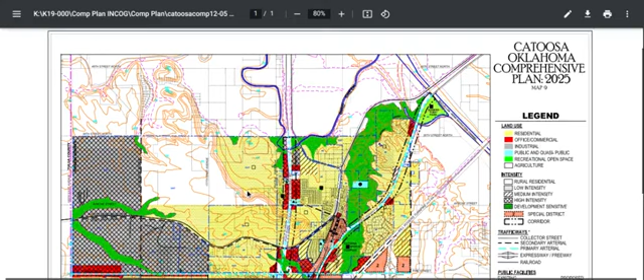Okay, let's get to the map. This is the INCOG map prepared back in 2000, 2001. But they've taken the comprehensive plan and laid it over this map. So this is the 2025 comprehensive plan, which the Unified Development Code goes hand in hand with.

If you'd like to read the comprehensive plan, it is also on the cityofcatoosa.org website. This Unified Development Code is a zoning code. I'm all flustered now that I've had to start over. As I was saying before, I messed up - I'm reading through the comprehensive plan.

I've already read through the comprehensive plan in part 1. If you'd like to go back and watch that video, it's on YouTube. I need to link those. It's still in the group - if you click on my face in the group, it'll show you all the things I've posted, and you should see all the videos. You can scroll back and find part 1 to see where I went over the comprehensive plan. I didn't read it word for word, but I went over it and explained some of it.

And this Unified Development Code is zoning. Basically, they're taking their old zoning and re-documenting it into a new form, supposedly making it more streamlined and simple. I've never seen the old zoning codes, so I wouldn't mind having a copy to compare.

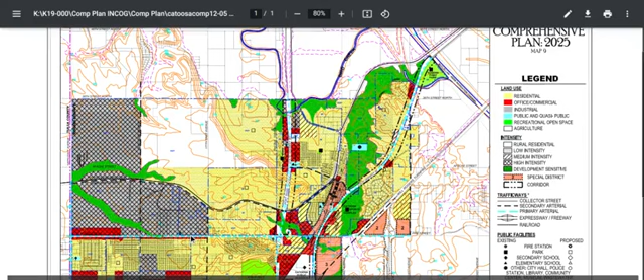They have color-coded areas of the town showing their purpose or use. Yellow represents residential, red represents office or commercial, gray is industrial, blue is public use and quasi-public, recreation and open spaces are in green, agriculture is in white - though the schools aren't shown in there. It also gives you intensity levels.

So the gray over here is medium and high intensity industrial area. The hashes and the dots all represent types of those districts. Down here for Little Rolling Hills, we've got our residential yellow, considered low intensity. But we have a high intensity office commercial area with a little bit of industrial.

The orange is special districts, which includes along Cherokee and 66, and some stuff over here. The city of Catoosa lies within the boundaries. The fence line is color-coded - city limits is in blue with 2 dashes, county lines in pink. It even goes over the floodplains and does some contouring, so that's the map there.

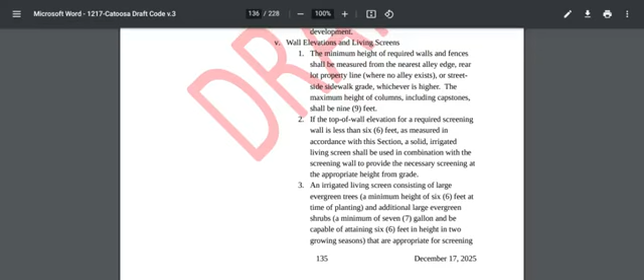If the top of wall elevation for a required screening wall is less than 6 feet as measured in accordance with this section, a solid irrigated living screen shall be used in combination with the screening wall to provide the necessary screening at the appropriate height from grade. An irrigated living screen consisting of large evergreen trees, a minimum height of 6 feet at time of planting, and additional large evergreen shrubs, a minimum of 7 gallon, and to be capable of attaining 6 feet in height in 2 growing seasons that are appropriate for screening purposes.

For screening purposes. Let me blow it up. I always forget to do that. That way it's easier to read through the screen.

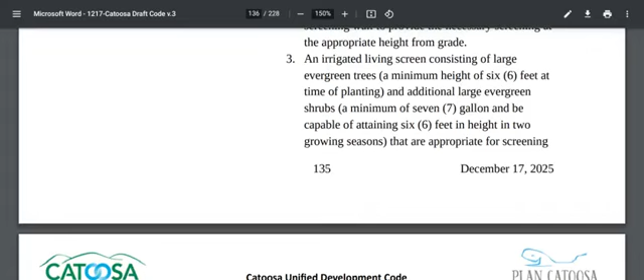Alright, let me start that sentence over. An irrigated living screen consisting of large evergreen trees, and additional large evergreen shrubs, and be capable of attaining 6 feet in height in 2 growing seasons that are appropriate for screening purposes, selected from the city's approved plant list, shall be planted within the landscape edge where the height deficiency occurs.

All plant materials used for living screens shall be insect and disease resistant, shall be plant species that are well freeze hardy, low maintenance, well adapted to the north central Texas area, and drought tolerant, such as they are self-sustaining with minimal irrigation and care.

Well, this is interesting. So, is this like a plug-and-play unified development code, since this says north central Texas and not northeastern Oklahoma? What page is this?

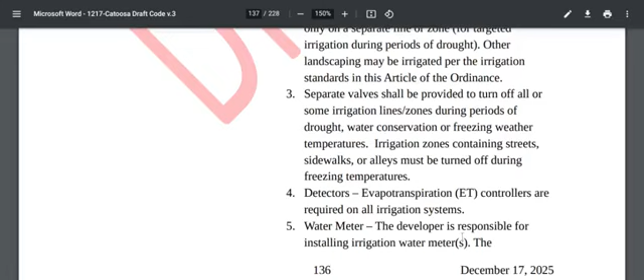Detectors: evapotranspiration controllers are required on all irrigation systems. Water meter: the developer is responsible for installing irrigation water meters. The administrator shall approve all water meter sizes and placement. All water meters shall be easily accessible from the street.

Access gate emergency accesses: all private perimeter fencing that creates gated access shall install a Knox security system or other approved access device located at one or more access gates for emergency access by the police or fire department. All private perimeter fencing that creates gated access shall be registered with the police department.

HOA responsibilities: all developments that have thoroughfare screening, entry features, or common amenity areas shall be required to have a mandatory homeowners association to own and maintain such features.

Okay. Residential privacy fences, applicability: this section applies to replacement of residential fences or construction of new fences. So this covers everybody. A fence permit is required if more than 25% of the length of the fence is replaced within an 18-month period.

Okay, so if a quarter of your fence falls in a storm, you have to get a permit to build it back.

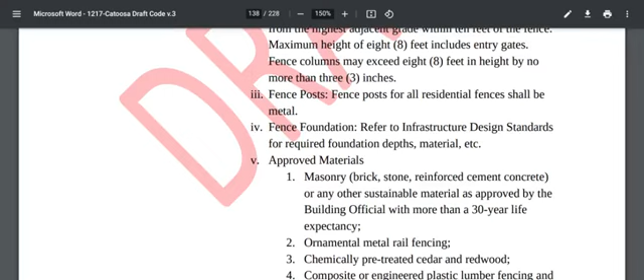Approved materials: masonry, brick, stone, reinforced cement, concrete, or any other sustainable material as approved by the building official with more than a 30-year life expectancy. Ornamental metal rail fencing.

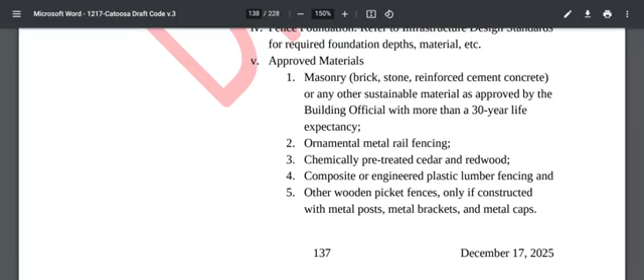Chemically pre-treated cedar and redwood, composite or engineered plastic lumber fencing, and other wood picket fences only if constructed with metal posts, metal brackets, and metal caps. Chemically pre-treated wooden horizontal members shall be at least 2 inches by 4 inches.

Prohibited materials: 1. Chain link, unless replacing or repairing an existing lawfully installed chain link fence. 2. Sheet, roll, or corrugated metal. 3. Cast off, second-hand, or other items not originally intended to be used for constructing or maintaining a fence. 4. Razor wire or barbed wire. 5. Slatted materials used to create opacity.

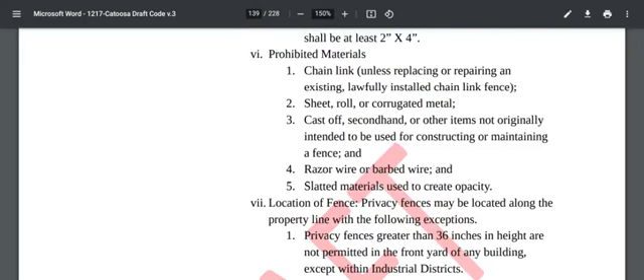Location of fence. Privacy fences may be located along the property line with the following exceptions. Privacy fences greater than 36 inches in height are not permitted in the front yard of any building except within industrial districts.

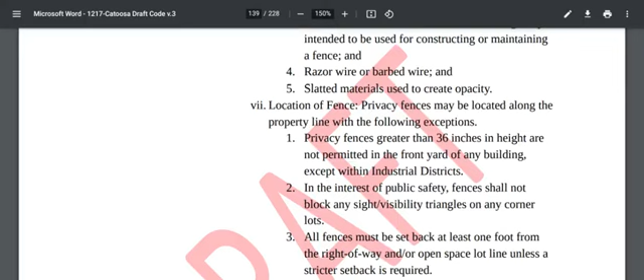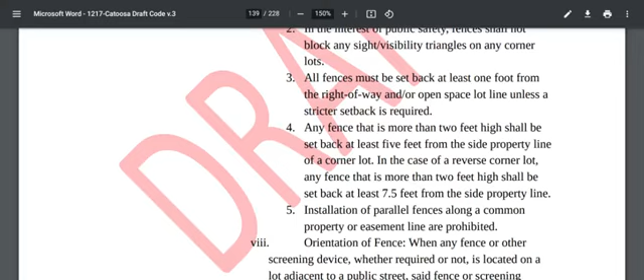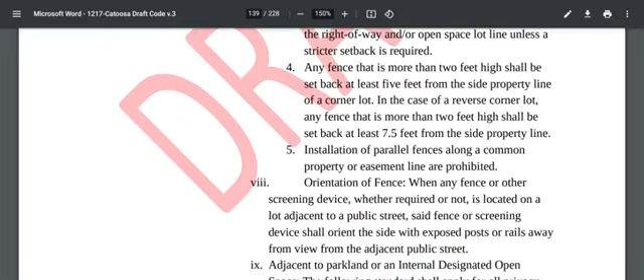In the interest of public safety, fences shall not block any sight visibility triangles on corner lots. All fences must be set back at least 1 foot from the right-of-way and open space lot line unless a stricter setback is required. Any fence more than 2 feet high shall be set back at least 5 feet from the side property line of a corner lot. In the case of a reversed corner lot, any fence more than 2 feet high shall be set back at least 7.5 feet from the property line. Installation of parallel fences along a common property or easement line are prohibited.

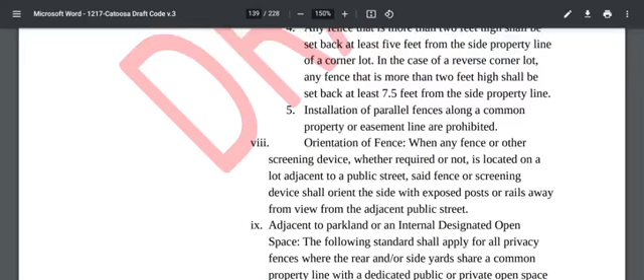Orientation of fence. When any fence or other screening device, whether required or not, is located on a lot adjacent to a public street, said fence or screening device shall orientate the side with exposed posts or rails away from view from the adjacent public street.

Adjacent to parkland or internal designated open space, the following standards apply for all privacy fences where the rear and or side yard shares a common property line with a dedicated public or private open space or parkland. Height shall not exceed 8 feet as measured from the highest adjacent grade within 10 feet of the fence. Fence columns may exceed 8 feet in height by no more than 3 inches.

Approved material: ornamental metal rail fencing with columns or ornamental metal posts shall be used to provide at least 50% transparency. In the interest of privacy, homeowners may choose to plant vines or shrubs along the fence on their property.

Well, thank you. We have permission.

Fences and front yard setbacks. Fences and front yard setbacks are prohibited unless otherwise approved in district-specific standards adopted by the City Council.

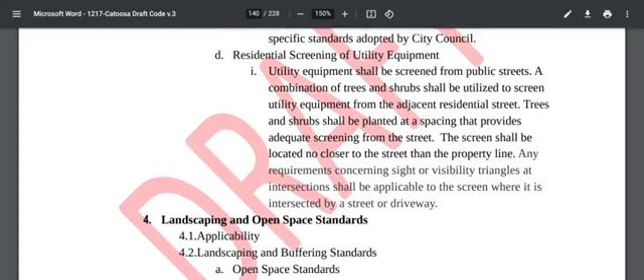Residential screening of utility equipment. Utility equipment shall be screened from public streets. A combination of trees and shrubs shall be utilized to screen utility equipment from the adjacent residential street. Trees and shrubs shall be planted at a spacing that provides adequate screening from the street. The screen shall be located no closer to the street than the property line. Any requirements concerning sight or visibility triangles at intersections shall be applicable to the screen where it is intersected by a street or driveway.

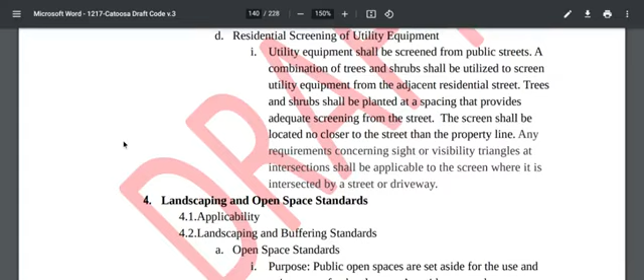Why does that fade out? That's weird. I'm checking again. I'm bothered that I did not set that up right. Okay.

Landscaping and open space standards. Where are we at now? 140. Okay. Applicability. Landscaping and buffering standards.

Open space standards. Purpose. Public open spaces are set aside for the use and enjoyment of a development's residents, employees, or users. Public open space serves numerous purposes, including preservation of natural areas and resources, ensuring greater resident access to open areas and recreation, reducing the heat island effect, enhancing stormwater quality, providing public health benefits, and providing for the general health and welfare of the citizens of Catoosa.

Applicability. All development subject to this article shall set aside the following minimum amounts of land as public open space that meets the standard of this section. For a single-family attached development with more than 5 units, at least 200 square feet per unit. For non-residential mixed-use buildings with a gross floor area greater than 10,000 and up to 50,000 square feet, 5% of total gross site area. For non-residential and mixed-use buildings with a gross floor area greater than 50,000 square feet, 7% of total gross site area.

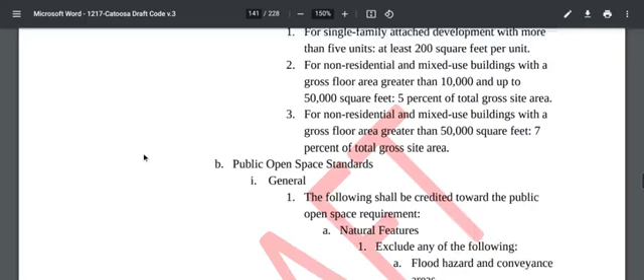Open space standards, general. The following shall be credited toward the public open space requirements. A. Natural features. Exclude any of the following: flood hazard and conveyance areas, water features including wetlands and lakes, hillsides and exposed slopes of more than 10%, wildlife habitat areas for threatened and endangered species.

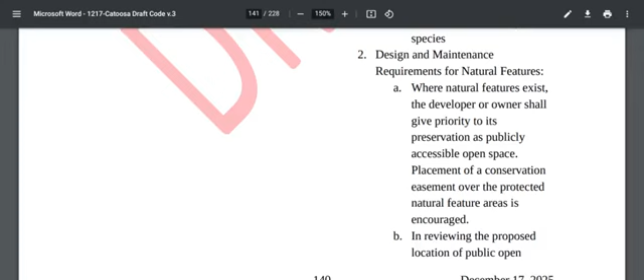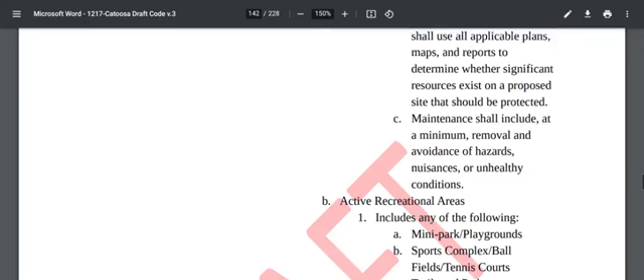2. Design and maintenance requirements for natural features. Where natural feature exists, the developer or owner shall give priority to its preservation as publicly accessible open space. Placement of a conservation easement over the protected natural feature areas is encouraged. In reviewing the proposed location of public open spaces, the administrator shall use all applicable plans, maps, and reports to determine whether significant resources exist on a proposed site that should be protected. Maintenance shall include a minimum removal and avoidance of hazards, nuisances, and or unhealthy conditions.

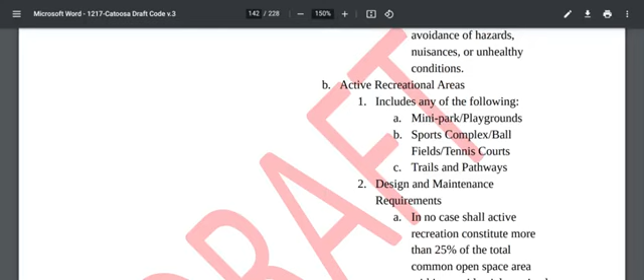Active recreational areas include any of the following: mini park, playgrounds, sports complex, ball fields, tennis courts, trails, and pathways. Design and maintenance requirements: in no case shall active recreation constitute more than 25% of the total common open space area within a residential or mixed-use district.

Land shall be contiguous unless the land is used to link to an existing or planned open space resource. The site shall be adjacent to at least one street or public access easement.

Landscaping shall be planned along all rights-of-way to provide a buffer to surrounding areas. Plazas and neighborhood parks, including any of the following: a neighborhood park, a community park, HOA private park, squares, courtyards, forecourts, or plazas.

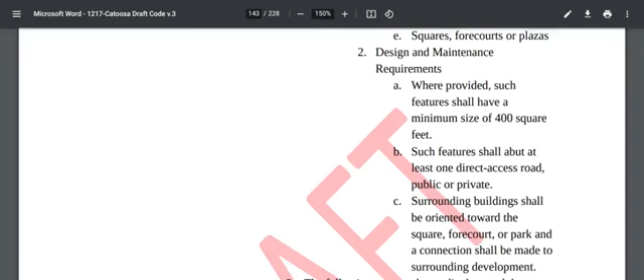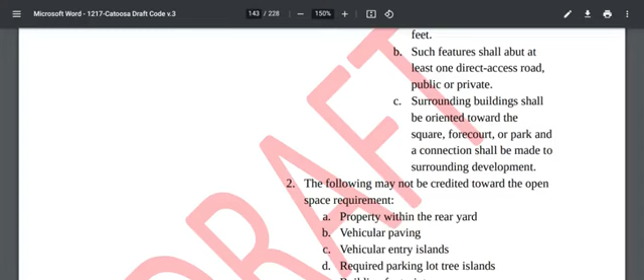Design and maintenance requirements: where provided, such features shall have a minimum of 400 square feet. Such features shall abut at least one direct access road, public or private. Surrounding buildings shall be oriented toward the square, forecourt, or park. A connection shall be made to surrounding development.

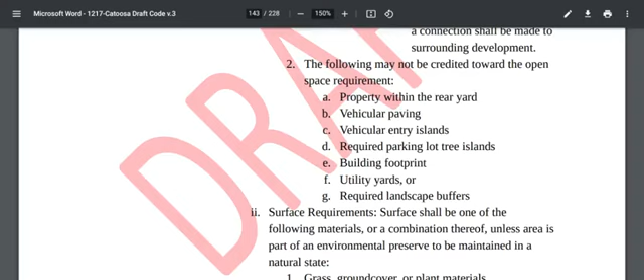The following may not be credited toward the open space requirement: property within the rear yard, vehicular paving, vehicular entry islands, required parking lot tree islands, building footprint, utility yards, or required landscape buffers.

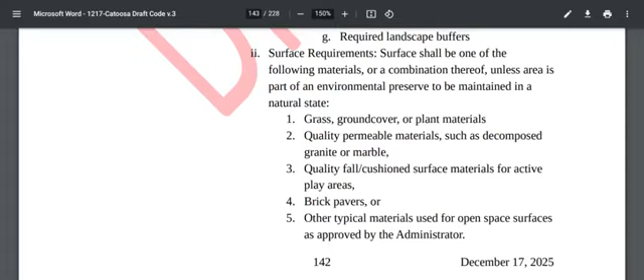Surface requirements. Surface shall be one of the following materials or a combination thereof, unless the area is part of an environmental preserve to be maintained in a natural state: 1. Grass, ground cover, plant materials. 2. Quality permeable materials such as decomposed granite or marble.

Quality fall cushion surface materials for active play areas. Brick pavers or other typical materials used for open space surfaces as approved by administrator.

General design standards for public open space.

Oh, I need to yawn real quick.

Land set aside for required public open space shall meet the following standards. Location: where appropriate, open space shall be located to be readily accessible and usable by residents and users of the development. To the maximum practical extent, the open space shall be open to public view to benefit area developments, enhance the visual character of the city, protect public safety, and minimize conflict with adjacent land uses.

Configuration: the lands dedicated as open space shall be contiguous to each other unless the land is used as a continuation or linked to an existing or planned adjacent open space resource, or where specific natural or topographic features require a different configuration. This does not apply to master plan communities that contain more than one open space to meet the requirements.

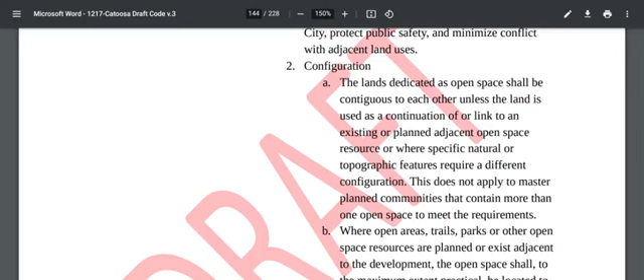Sorry, I'm stopping. Okay, configuration: the lands dedicated as open space shall be contiguous to each other unless the land is used as a continuation of or linked to an existing or planned adjacent open space resource, or where specific natural or topographic features require a different configuration. This does not apply to master plan communities that contain more than one open space to meet the requirements.

Where open areas, trails, parks, or other open space resources are planned or exist adjacent to the development, the open space shall, to the maximum extent practical, be located to adjoin, extend, and enlarge the presently existing trail, park, or other open land area.

Orientation of adjacent lots and buildings: lots and buildings adjacent to the required open space, not including perimeter landscape buffers, shall have at least one entrance facing the open space. Provision: multi-phase developments proposed in phases shall be considered as a single development for the purposes of applying the open space requirements.

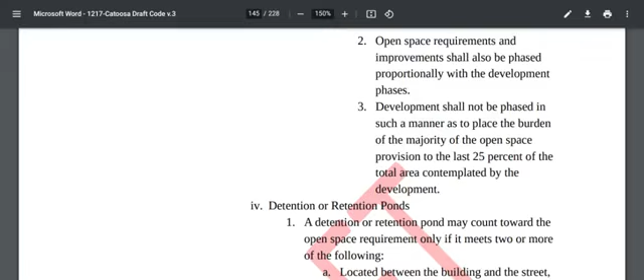Open space requirements and improvements shall be phased proportionally with the development phases. Development shall not be phased in such a manner as to place the burden of the majority of the open space provision on the last 25% of the total area contemplated by the development.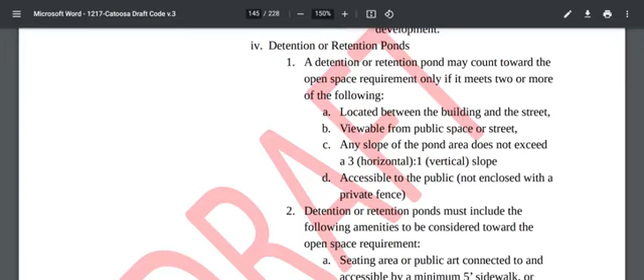Detention or retention ponds: a detention or retention pond may count toward the open space requirement only if it meets two or more of the following: located between the building and the street, viewable from public space or street; any slope of the pond area does not exceed a 3-to-1 slope; accessible to the public, not enclosed with a private fence.

Detention or retention ponds must include the following amenities to be considered toward open space requirements: a seating area or public art connected to and accessible by a minimum 5-foot sidewalk, or an aerator fountain in the pond visible from a minimum 5-foot sidewalk, and one tree or planter at least 16 square feet for every 200 square feet of open space, located within or adjacent to the open space. In addition to the landscaping requirements, existing trees that are preserved can count towards this requirement.

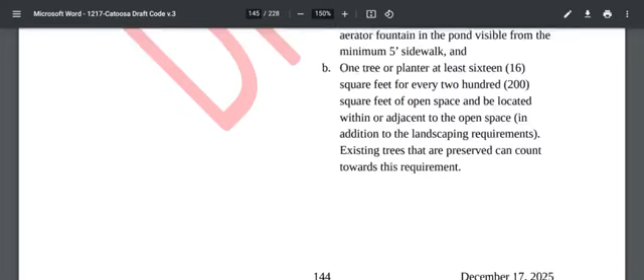Does that include if they're the wrong tree?